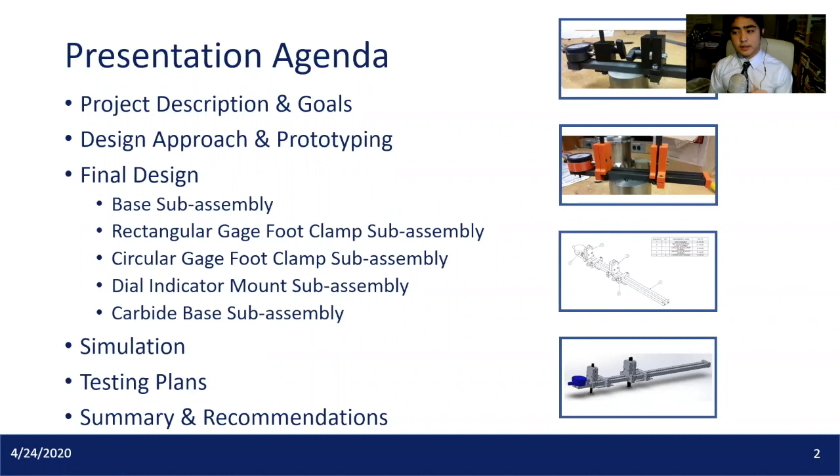I'm Ashley Sandara, and we'll be presenting our project on the design and manufacture of an efficient and cost-effective swing gauge. Our faculty advisor is Tom Mealy, and our industry advisor is Pete Donaker from Aerocision, a customer-driven manufacturing company for aerospace OEMs. First, a brief agenda of our presentation. We'll talk about the project description and goals, then the design approach and prototyping methodology, and we'll go through our final design and then finish off with a summary and recommendations.

So our project is to design, test, and build an inner and outer diameter swing gauge. Aerocision has given us a list of set criteria that they'd like us to meet throughout this project. The first is that the swing gauge has to be able to read a diameter range between 2 and 20 inches, as well as cost $300 to $400, which is 1/4 to 1/3 of the current swing gauge that Aerocision is using right now.

The swing gauge also has to be able to read up to 1/10,000th of an inch, as well as withstand temperatures between 68 and 72 degrees Fahrenheit, which is just a comfortable work environment on the Aerocision shop floor. And the calibration time for the swing gauge also has to be reduced down to 1 to 2 minutes.

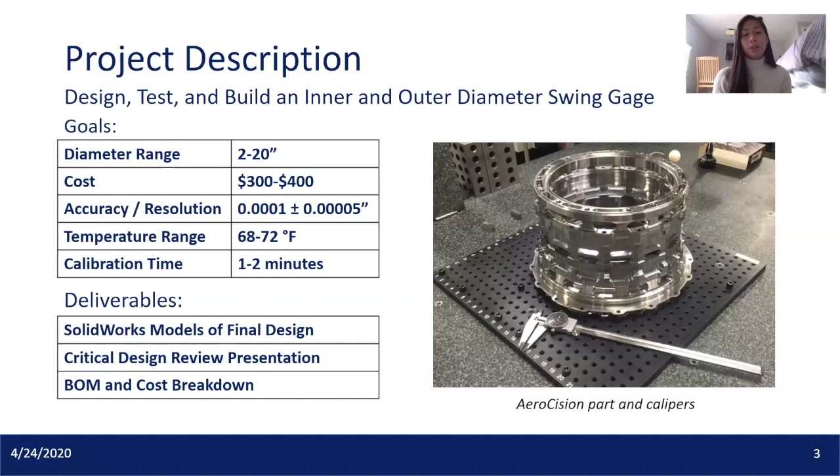Some hard deliverables that we have to provide in this project are a SolidWorks model of the final design, as well as a critical design review presentation that we performed earlier in March. We also have to provide a bill of materials and a cost breakdown of our final gauge.

We did do some prototyping before we got to our final design, three in total. With each prototype we wanted to focus on one specific concept to improve. As you can see in this video, this is our third and final prototype before our final design. We are just measuring a circular part, and you can see that the dial indicators pick up any variance in that diameter reading.

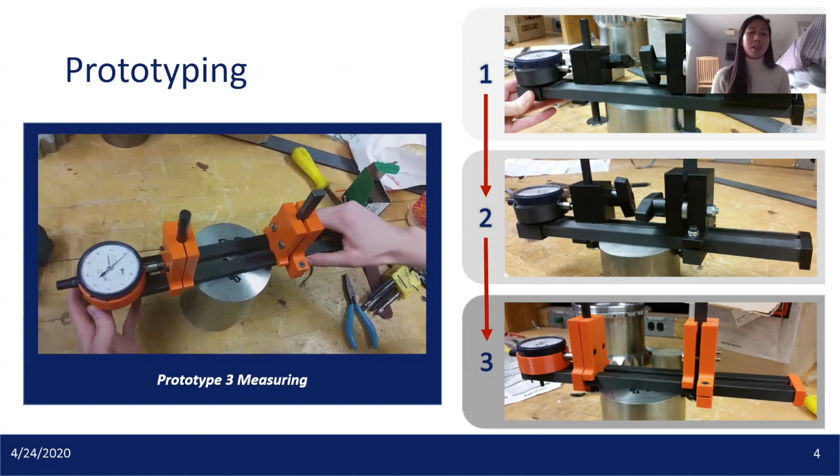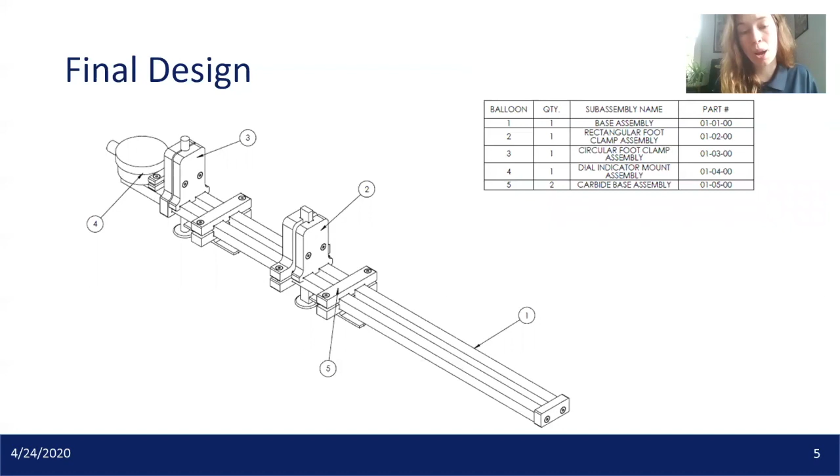Based on what we learned from prototyping, as well as our discussions with the Aerocision engineering team, we came up with the final design shown below, which includes 5 subassemblies that allow us to meet all of the project goals, including being adjustable between 2 to 20 inches and having an accuracy of 1/10 of a thou of an inch. We kept the weight of the overall gauge in mind with our material choice of aluminum 6061, as well as the usability for operators by standardizing all of the hardware.

So our gauge has to be able to hold gauge feet at a specific height. Our approach to this was to model a clamp similar to a bench vise. As you can see, we have 2 different ones. The one on the left is the one that's actually interacting with the dial indicator, so this is the one that's going to be picking up the readings of any variance in the diameter reading. The one on the right is the one that's going to be working with the axial base clamp, so this is the one that's going to be adjusted to the specific diameter that you would like to set it to.

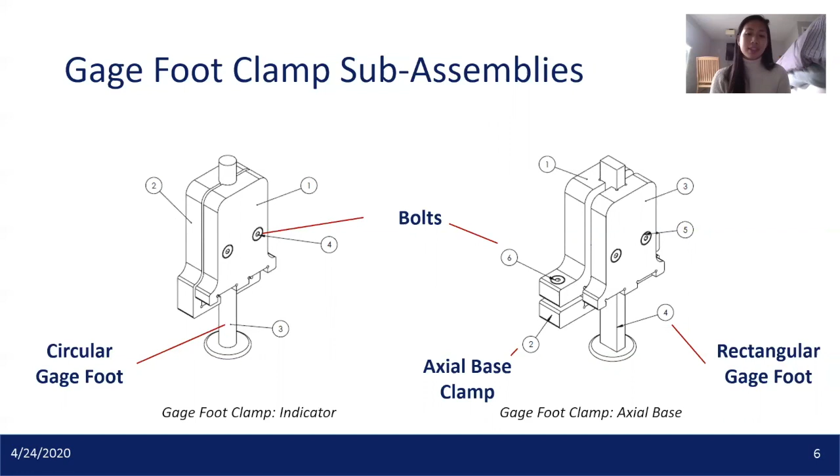The next subassembly is the dial indicator mount. We chose a compression/tension spring, depending on either ID or OD measurements, that works with the dial indicator and interacts with the gauge feet clamps Ashley talked about previously. It features a clamp style base for a secure, unmoving fit and a linear constraining rod to keep a consistent spring force.

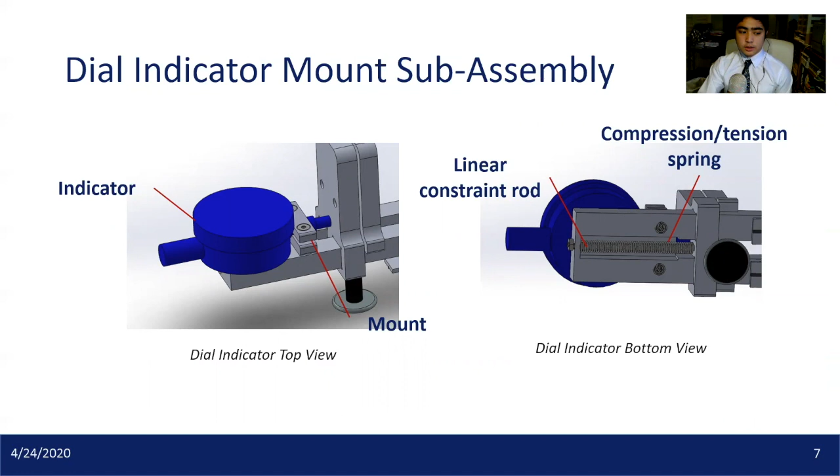The carbide base subassembly uses the same clamping style as the gauge feet clamp, and it provides a secure surface to set the gauge on while measuring components that will not mar the surface of the component.

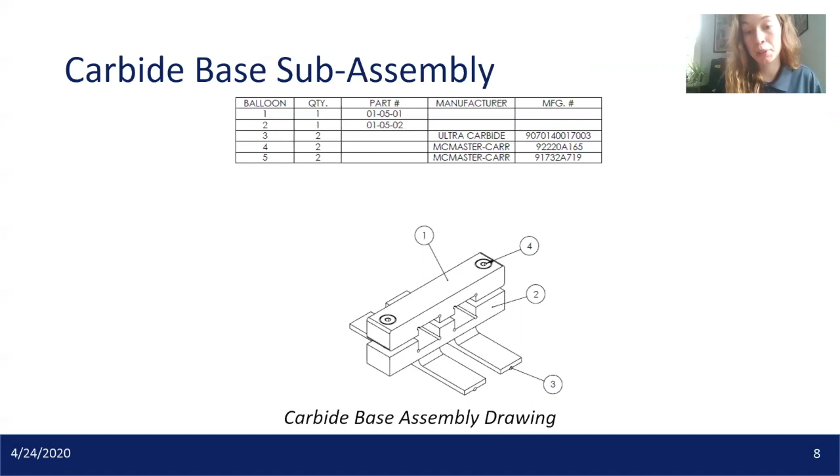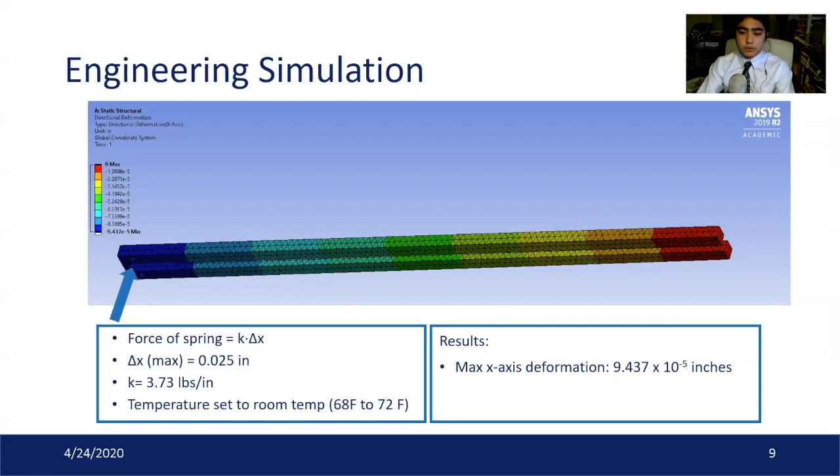An accurate temperature and load simulation was important to ensure the measurements stayed within the accuracy range. For this simulation, we used a fixed support as well as the force of the spring, and set the temperature to room temperature between 68 and 72 degrees Fahrenheit to see if the max deformation was less than 1/10 of a thou, to ensure that the base stayed within the accuracy range.

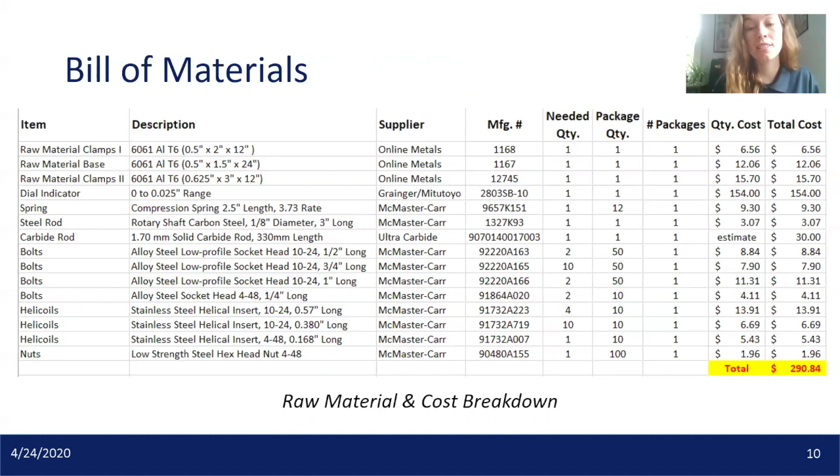Shown now is the bill of materials, which includes all of the raw materials, purchased components, and hardware needed to make each gauge. The costs included are only recurring costs should they choose to manufacture more than one gauge. As you can see, we are $10 under the $300 to $400 budget, which leaves some room to include the machining costs, because every manufacturing company has a different cost that they associate with hours of machining.

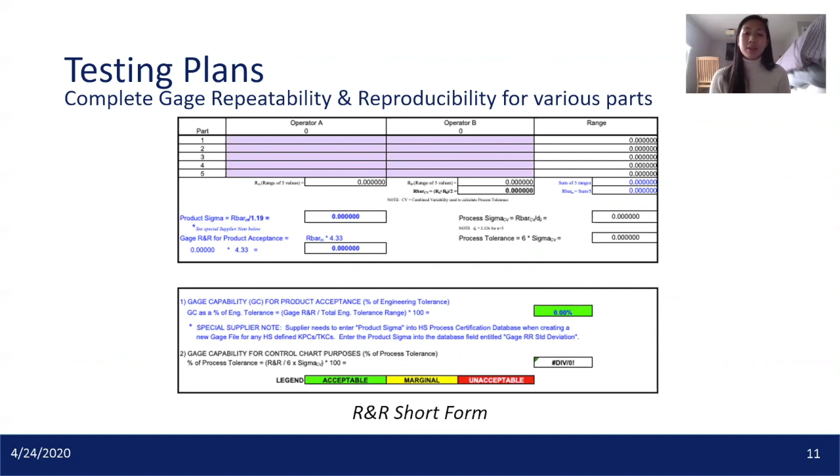In order to test the accuracy of our gauge, we wanted to perform a test that they actually do at Aerocision called gauge repeatability and reproducibility. This essentially has different people measure 5 different parts and measures the variance between all the readings to see how accurately your gauge is working. So in summary, we'll be providing Aerocision with final assembly and manufacturing instructions so they can manufacture the gauge and perform gauge R&R testing on it.